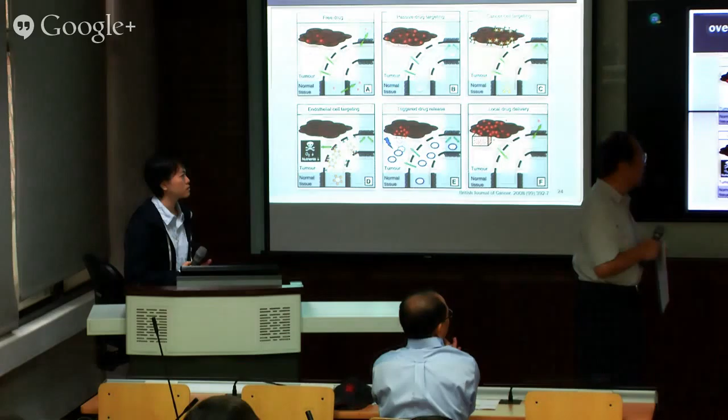Thank you for your presentation regarding nanomedicine. Actually, the size and permeability have an effect on penetration of drug molecules. Sometimes high penetration can affect the normal cell. For this, why did you make the conclusion to design nanomolecules for targeted cells? But I would like to know what is your prediction on how the nanomedicine can be tailored for the targeted tumor cell.

Can you repeat your question again? Actually, you made the conclusion that we need to design nanomedicine or nanomolecules for targeted cells because high penetration can cause or affect the normal cell. But I would like to know how we can design or tailor for the targeted cell, targeted affected or tumor cell. How can we do this job?

You mean how to design a better targeted nanoparticle? For targeted affected cell, because sometimes high penetration of nanomolecule medicine can affect the normal cell.

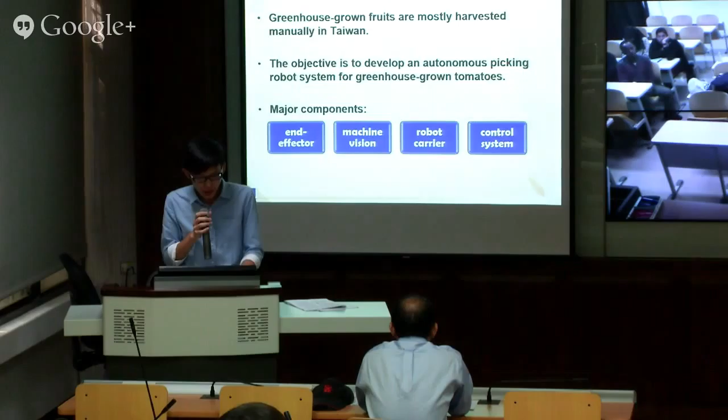The objective of this study was to develop an autonomous picking robot system for greenhouse-grown tomatoes, which consists of four major components: the first one is end effector, machine vision, robot carrier, and control system.

According to the development, the technology of applying robots to agricultural production has become mature, and it needs to be further tested for real tomato picking operation in greenhouse in the future.

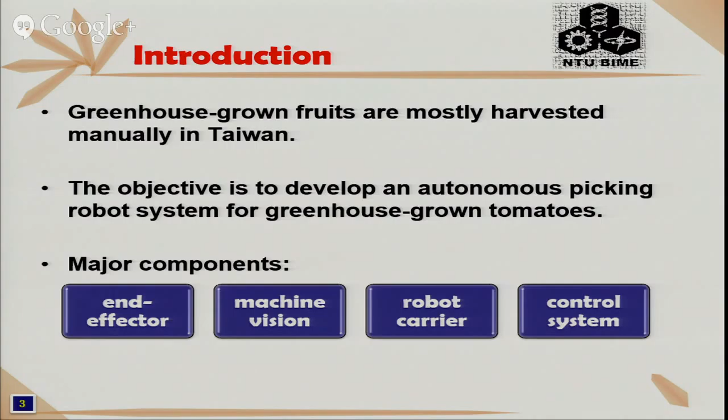The second part is materials and methods. In this part, I will divide it into two parts to introduce: design of the autonomous picking robot system and the picking test.

The autonomous picking robot system proposed by this study consists of four major components: the end effector, the machine vision, robot carrier, and control system. The control system consists of robot carrier control, image processing, robot arm and end effector control, and the central control unit.

As for picking tests, I will present the joint picking test of the end effector, and the second is the integration test of the autonomous picking system.

The first part is design of the autonomous picking robot system. The end effector of this study is fixed to the front end of the robot arm. The control signals of the end effector are transmitted from the computer or controlled by the robot arm control unit through the RS-232 adapter card.

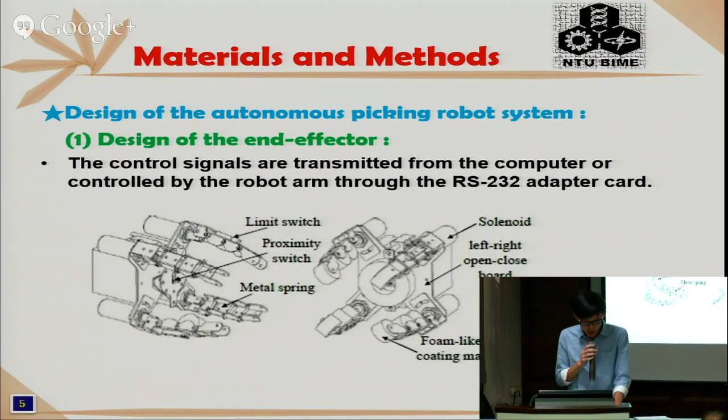This picture is the schematic diagram of the end effector. The end effector is designed with 4 fingers. Each finger has 3 joints, which can bend by spring lifts, and each finger is mounted with foam-like soft coating material to reduce fruit and vegetable injuries during picking. In addition, the end effector is equipped with a photoelectric proximity switch, 2 limit switches, and 4 solenoid actuators to detect whether the tomato is in the clamping claw and drive the claw fingers to bend.

The second one is design of the machine vision system. The machine vision system consists of an image capture adapter card, a CCD camera, and a lens.

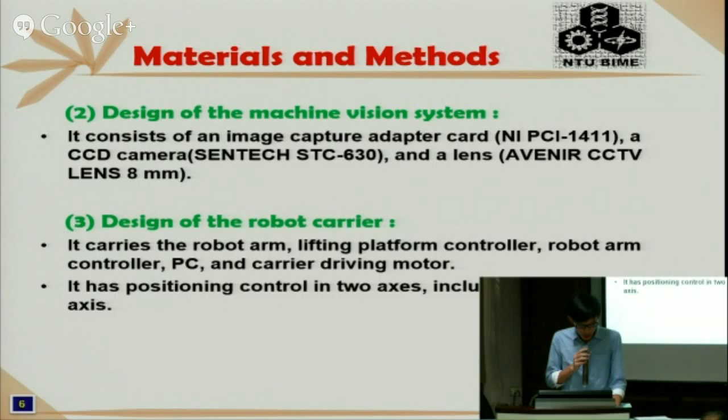The resolution of the CCD camera is 768 pixels multiplied by 494 pixels. The sensor chip is 1/3 inch, and the chip size is 4.8 millimeters multiplied by 3.6 millimeters. The lens focus is 8 millimeters, and the aperture range is 1.3 to 16. The camera transfers the captured image signals to the computer by an image capture adapter card for further processing, and the images are displayed on the screen.

The stereo vision system obtains an actual 3-dimensional position of each tomato feature for the end effector path planning.

The third part is design of the robot carrier. It carries the robot arm, lifting platform controller, robot arm controller, PC, and carrier driving motor. It has position control in 2 axes, including the X-axis and the robot carrier Y-axis.

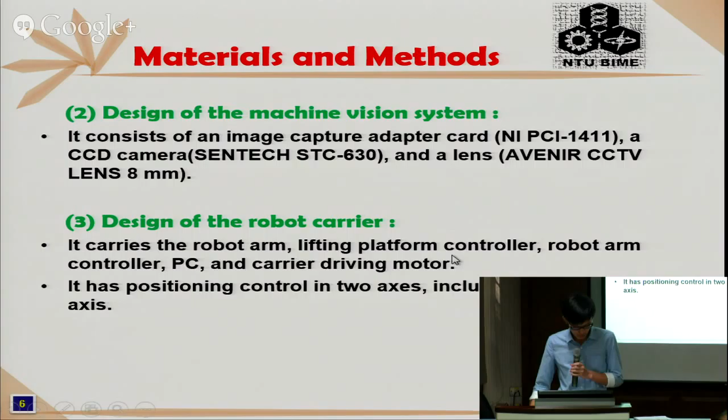The 4 wheels of the robot carrier move on the rail of the carrier in the X direction, driven by a 30-to-1 reduction motor of 3-phase, 230 volts and 90 watts. A rotary encoder with 400 pulses per revolution is employed to count the pulses to calculate the moving distance of the carrier wheels. The platform moves up and down in the Y direction, driven by a hydraulic device, and a linear encoder with 0.5 millimeters per pulse is applied to calculate the displacement of the platform.

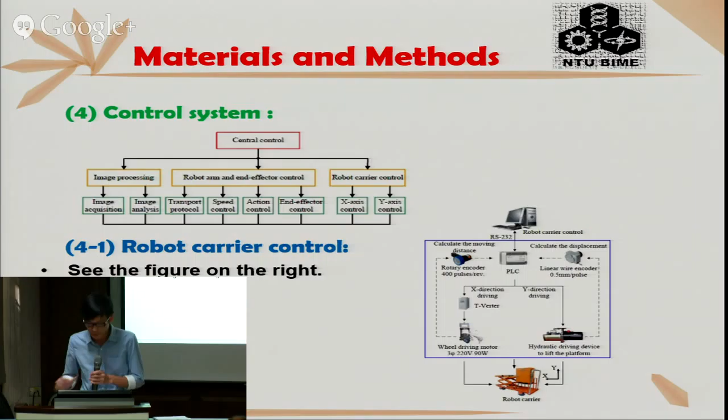The second part is image processing. The camera is controlled through an image capture card using the IMAQ. What is IMAQ? It is a module that was the image processing toolkit of LabVIEW. At first, the camera gets a good exposure image and conducts white balance adjustment to obtain a good image.

The program utilizes the hue index from the HSI color system to perform tomato grading, then searches the tomato position, individual and external characteristics on 2-dimensional coordinates. In addition, the program could also use image processing methods to find the center of the tomato if overlapping tomatoes occur.

First, the claw of the robot arm is fixed right in front of the target tomato, and the stretch is in this direction, driving the solenoid to bend the claw fingers. The robot arm then retracts in the same direction. The proximity switch detects whether there is a target tomato.

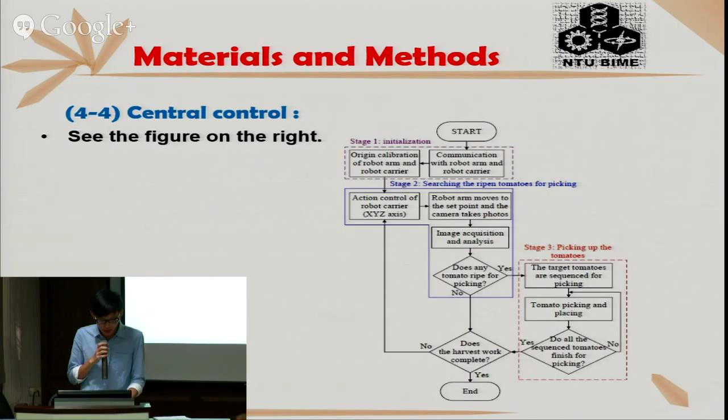The fourth part is central control. The picture on the right shows the control flow of the picking robot system. It has 3 stages.

This is the picking test. The first one is the joint picking test of the end effector and the vision system. The working distance of the camera is 660 millimeters, and the visual field is 396 by 297 millimeters, accounting for 52.57% of the visual field area.

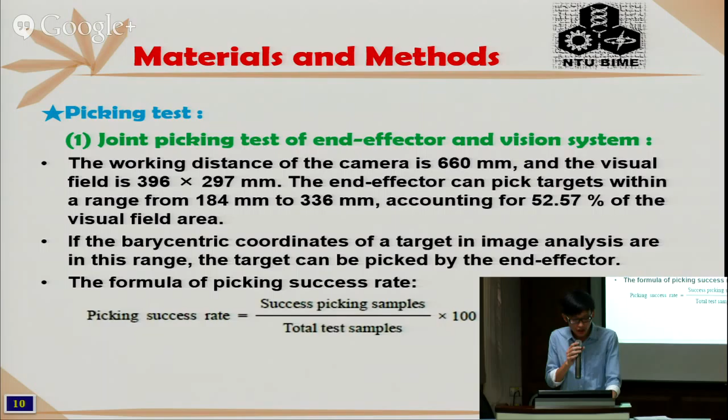If the barycentric coordinates of the target in image analysis are within this range, the target can be picked by the end effector. The third part is the formula of the picking success rate.

The dimensions of the greenhouse grown tomato picking robot system are 1,050 by 700 by 1,350 millimeters, and the total weight is around 2,190 newtons.

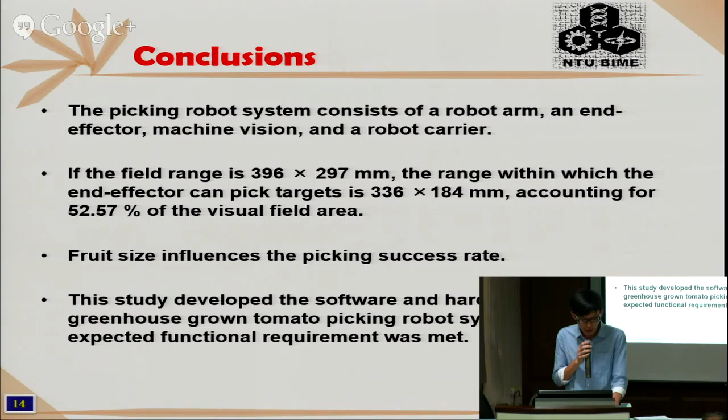LabVIEW version 7.1 graphical program language was used for constructing the control program. The field range is 396 by 297 millimeters. Within this range, the end effector can pick targets within 336 by 184 millimeters, accounting for 52.57% of the visual field area.

According to the picking success rate of the end effector integrated with machine vision, since the end effector size is fixed, higher accuracy is required for picking large fruits. Therefore, fruit size influences the picking success rate. This study developed the software and hardware for the greenhouse-grown tomato picking robot system, and the expected function requirements were met. Practical greenhouse-grown tomato picking operation tests will be conducted in the future, so the system will become more practical and applicable.

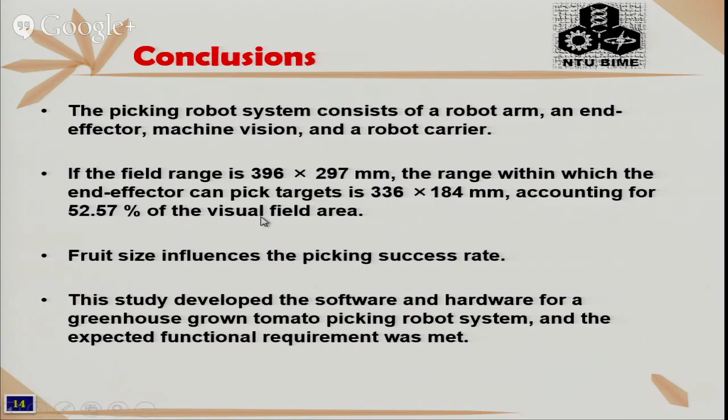Thank you for your presentation. I have a question about whether the robot can do the same work outside, or if it can only work in the greenhouse. If it can do it outside, what's the difference between the two places? In this study, the robot can't perform the operation outside, but I think in the future it can do it better.

You mean the difference between indoors and outside? In my opinion, I think the difference... I will look for other information to answer you after class. Okay, because the article, the study, doesn't mention it. Okay, thank you.

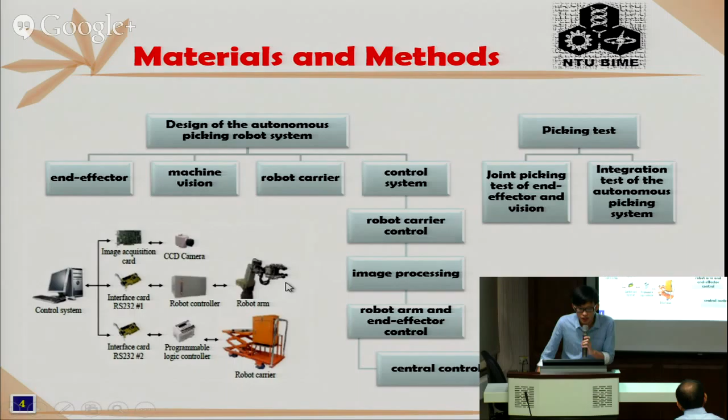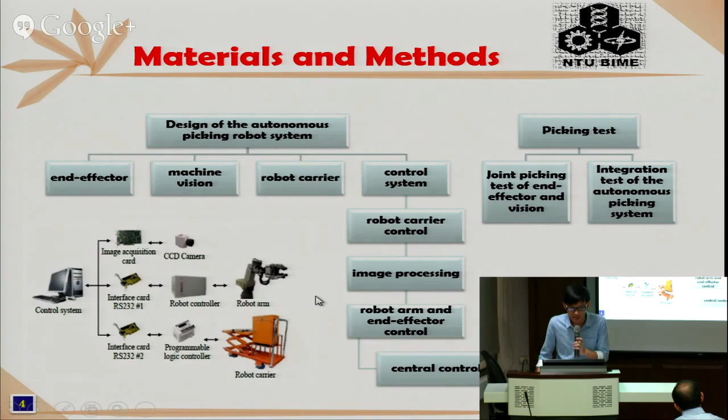They use the robot arm over there. This one is the end effector. We can use it to pick up the tomato. Okay, thank you.

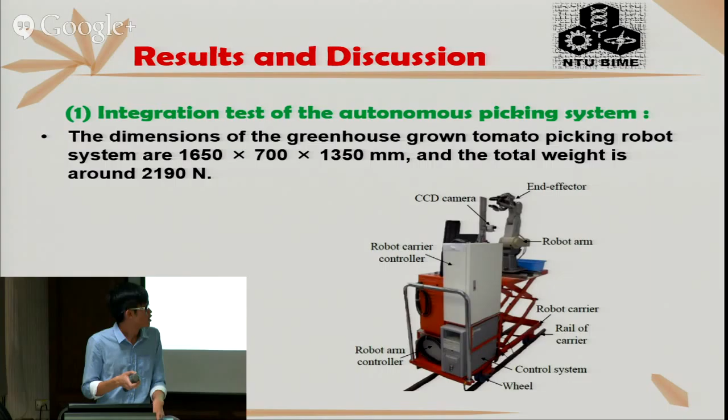Are there any more questions? I'd like to know the maximum load picking or carry capacity of the end effector. I mean, the end effector's capacity to pick up in terms of weight, kilograms, at a time. How much can it pick up at once? That means the load in kilograms, like that.

Oh, the end effector weight capacity, it can... The study does not mention it, but it can mention... Wait, give me a minute.

If the system continues operation, starting from point A, the path moves vertically or horizontally. The path in the picture shows how the machine system moves. Yes, I saw it from the picture, it's like a railway, maybe.

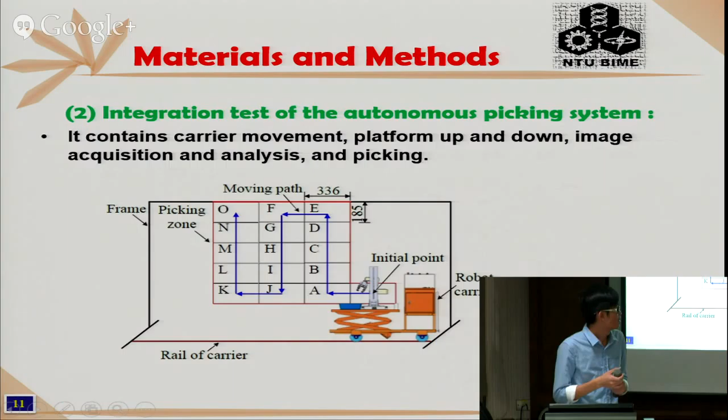Okay, thank you. I'll add some comments: the system is equipped with a stereo vision system, so it captures not only the XY coordinates but also the depth, the 3-dimensional location.